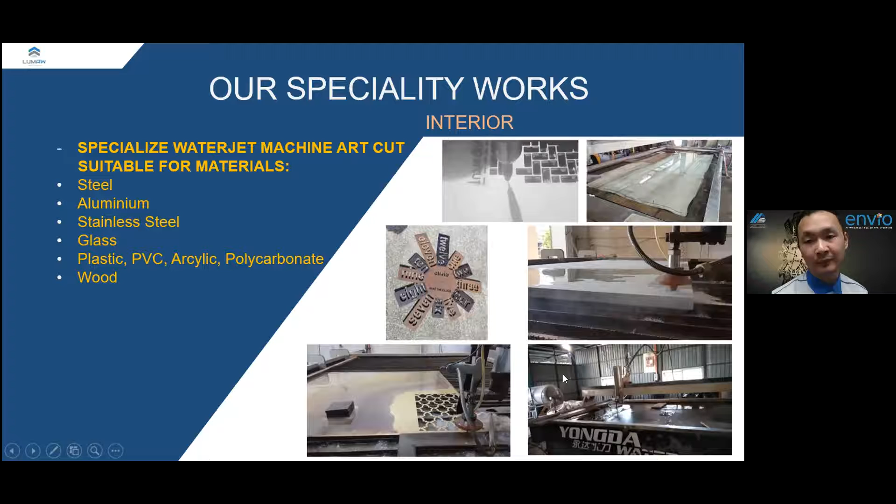The good thing about this water jet machine is it's capable of cutting a lot of types of material - steel, aluminium, stainless steel, even glass, plastic, PVC, acrylic, polycarbonate, and wood. With this range of material, I think that covers mostly all of the material in the construction industry. This machine is mainly used for cutting small volume materials that require very fine cutting. We are only one of the few fabricators that have this machine in Kuching, and one of the few that provide these services.

The steel cabinet, when mixed with the wooden cabinet, usually creates an industrial feel for this property. This cabinet is actually made out of steel hollow that is powder coated, and for the platform, we are using expanded metal to create this type of industrial feel and effect.

Of course, the security grill door follows the same pattern as the steel cabinet. We have a hollow powder coated frame and expanded metal covering. We have the house unit engraved into the door plate as well with our water jet machine. This is one of the latest trends we are doing. And of course, you can get us to design if you have any other ideas to incorporate steel or aluminium into your design, into your interior.

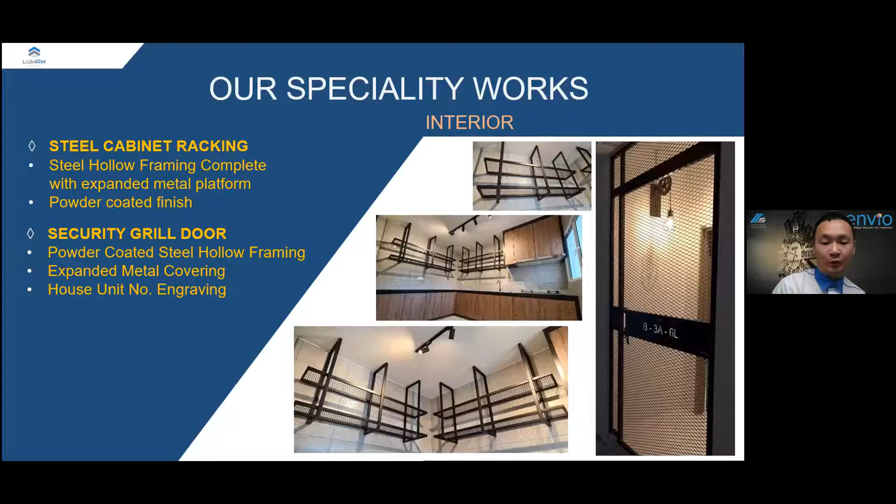Talking about interior, I think nowadays natural lighting is a very important factor. In order to attract natural light into your interior, you need to have a skylight roof. So there are a couple of skylight roofs that we did. For a skylight roof, we can use an aluminum frame with powder coated finish, or you need to use steel frames with powder coated or galvanized finish if your roof structure is too big and requires a lot of support. So for example, the two photos on the top right use a steel frame to fabricate this skylight roof.

The covering option we are offering is laminated tempered glass, which is a glass covering option. The second option is polycarbonate covering. So if the budget is not enough, you can go for the polycarbonate covering option. Polycarbonate material nowadays is also very long lasting due to high manufacturing technology and the quality control of the material itself. Polycarbonate can actually be as durable as a glass covering.

And of course, polycarbonate can save you a lot of cost. In terms of the framing, you can reduce the size and you don't need to make it very heavy duty. So that's a good thing about the polycarbonate covering. The top right two photos here are actually polycarbonate covering. And for the roof, we designed a cutting of the perforated sheets in flower shapes, and we fixed it on top to create this type of flower pattern.

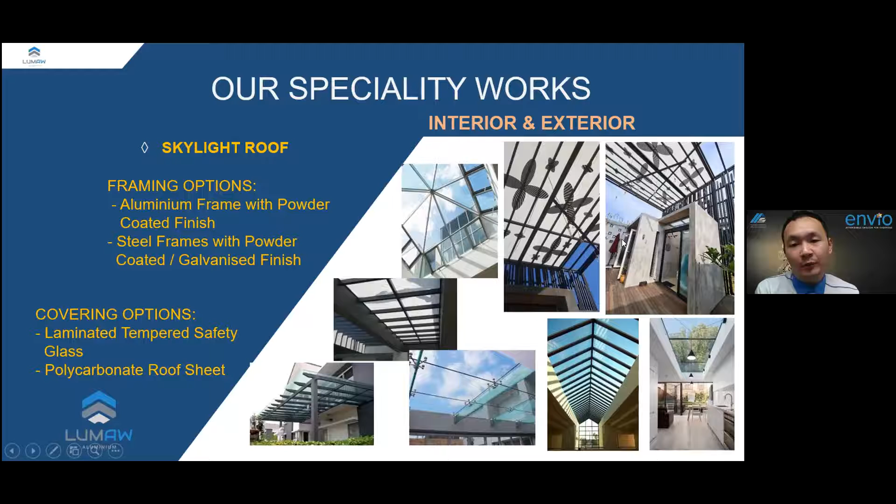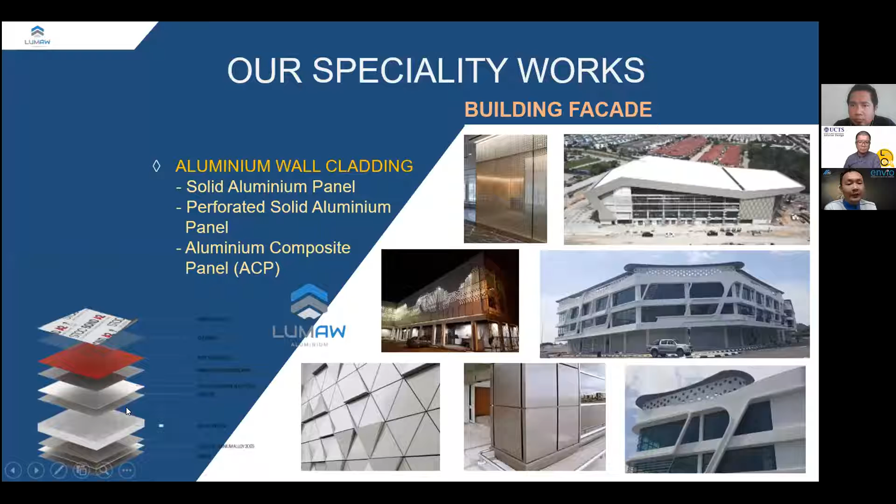If you are covering up the whole wall panel, like the one on the top right and the bottom left, then you have to use aluminum composite panel. Aluminum composite panel is a core layer laminated on both sides with aluminum sheets. The aluminum sheet is only 0.4 or 0.5 mm thick, but after lamination the whole thickness goes up to 5 to 6 mm. So this is aluminum composite panel.

Basically, you cannot perforate aluminum composite panel, because once it has holes, the internal part of the lamination will delaminate and water will go inside. So do not confuse perforated panel and aluminum composite panel. This is a brief introduction of the wall cladding.

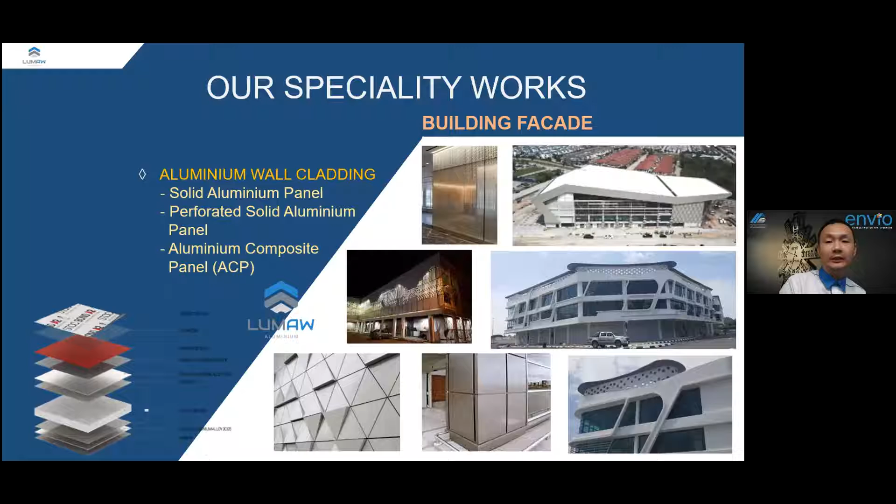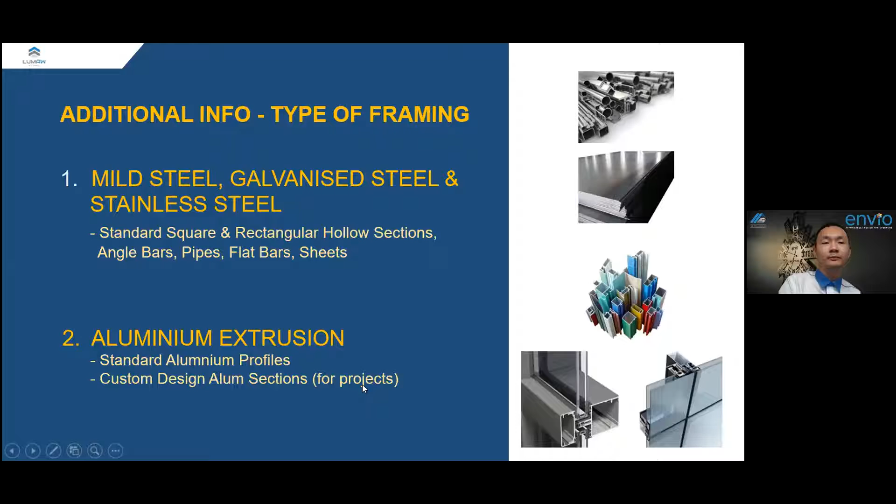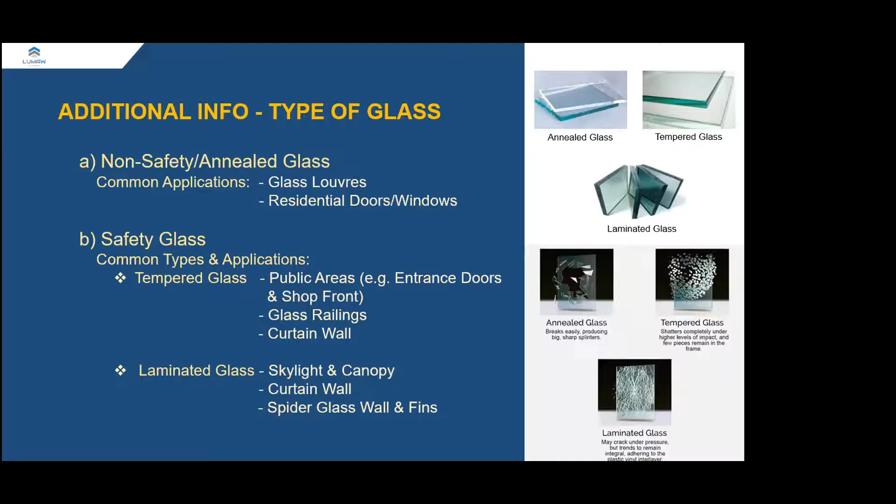So additional info for type of glass. This is what I mean by the glass information. So basically, glass is commonly differentiated into 2 types. One is non-safety glass. We call it annealed glass; some people call it float glass. Annealed glass or float glass is the most commonly used glass material without any extra production to it. This glass actually breaks easily, and when it breaks, it breaks into pieces that are sharp and long.

The most common application is in our old houses, and I think low cost housing is still using this type of application. They use it mostly on glass louvers, the glass louver windows used in old houses. And of course, safety glass is the most common application nowadays. Safety glass has 2 types: tempered glass and laminated glass.

So tempered glass, what are the advantages? Tempered glass is able to sustain a higher level of impact. It will not break easily. When it breaks, it shatters into small pieces, which are not as sharp as annealed glass. So this is the safety feature of tempered glass. But tempered glass will still break. And sometimes tempered glass may tend to break by itself without any reason after you fix it for a few months or 1 year.

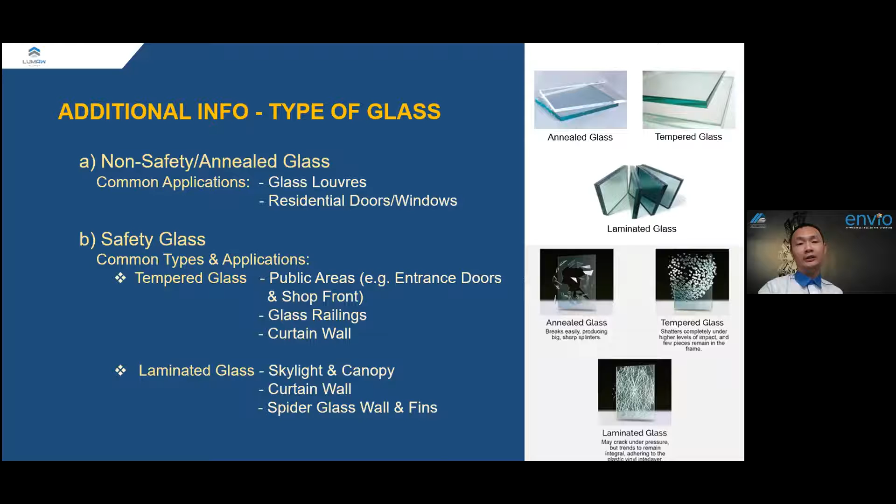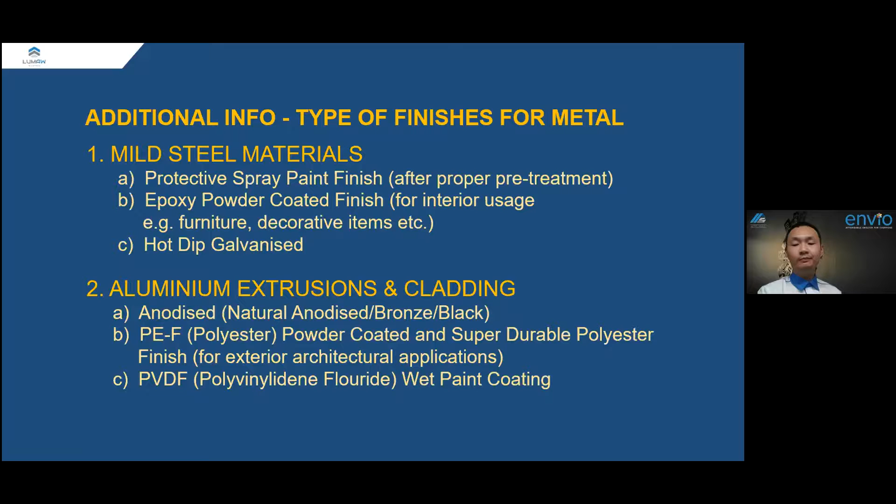PVDF finish is the most premium finish for aluminium cladding. PVDF is basically a type of paint that lasts in terms of color fading. PVDF paint only fades after quite a very long time. So that is the advantage of a PVDF finish. So that's all for the additional info.

So I would like to introduce other products that we have. It was just launched recently as well. Recently, I think planting is quite popular after the pandemic. Everyone is planting, whether in their own house or their own empty land. So what is the best option to plant vegetables without having to worry about pest issues? The best thing is, of course, to build yourself a greenhouse.

The greenhouse is actually the cheapest method to build a covering, because all the material is designed in a very small size. We do have this prefab greenhouse available. If you are interested, you can talk to us. The standard size is 6 meter width by 6 meter length. But of course you can always add on length depending on how much you want. One bay is 6 meter. The width is 6 meter as well.

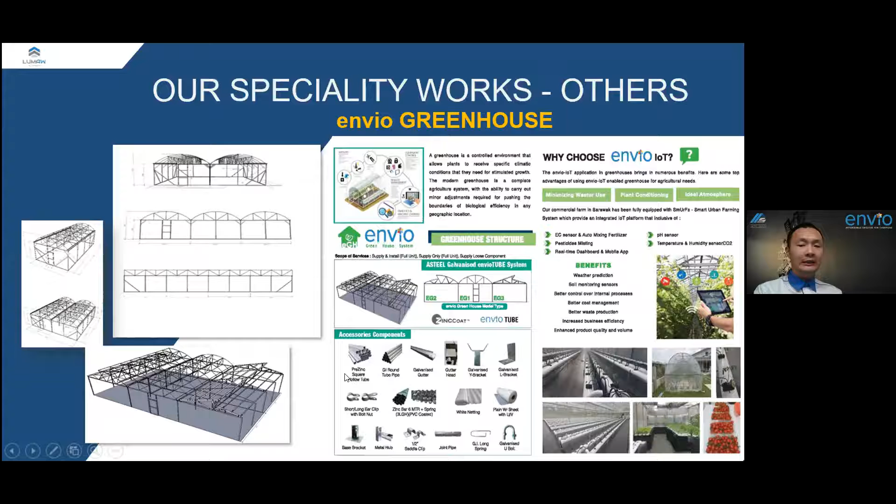So we have all these accessories available. You can talk to us. This is very easy and fast to erect, let's say you want to erect yourself a greenhouse. And these are the completed units that we did. This one we erected for them at Petra Jaya. And this is the sample unit you can see.

What you can see here is the top part of the greenhouse is covered by UV sheet. The UV sheet is to prevent the rain from coming down. But of course you do have air ventilation, because the side wall of this greenhouse is covered with netting. We'll cover up all this, so we'll make sure your greenhouse is sealed up. Then no pests can go in.

And you can dismantle this one, and if you want to relocate it to another place, you can relocate. So that's a good thing about this. And of course, we do have the planting system as well. You can talk to us about the type of plant you intend to grow.

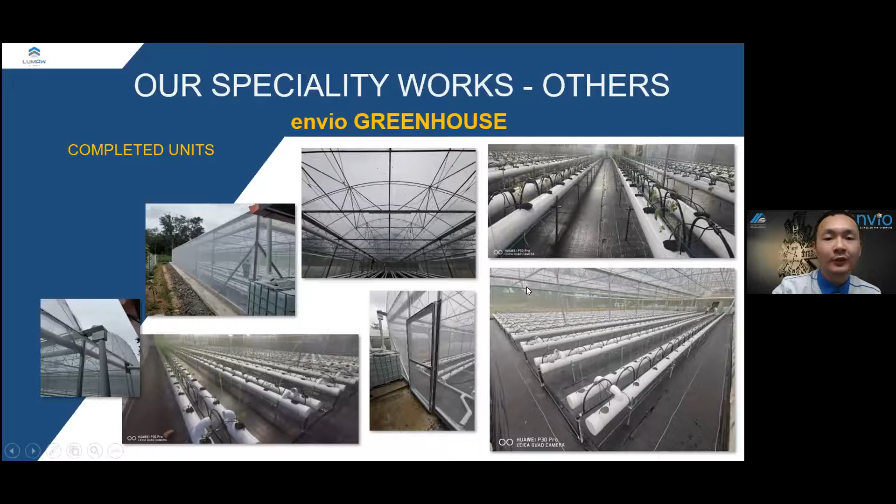So I believe that's all regarding the products and services that we provide. So any questions? For our guest participants today, if you have anything that you want to comment on or ask, you can just switch on your mic and chat with us. If you prefer to type it in the chat bar, you can do so as well. We will read out your questions, and Thony will be able to explain further.

Now, just to start off, there are 3 questions that I want to ask. Just a quick one. You mentioned the heat-soaked tempered glass, right? Yeah. Now, I wanted to know, for interior cases, if I want to use a glass top for my burner, the kitchen top burner. Kitchen top burner, okay. Yes. What glass would you be looking at? Kitchen top burner.

I'll explain why. I bought a kitchen burner set, the cooker, and it came with a glass top. After a while, the glass just exploded. The glass exploded, but luckily there was a sticker behind it. So I asked for a replacement glass piece. Of course, it was under a 4-year warranty, and it continued to blow out 3 times. Wow.